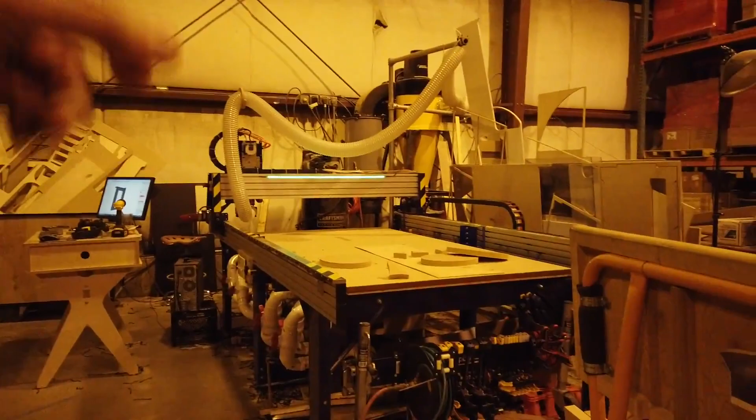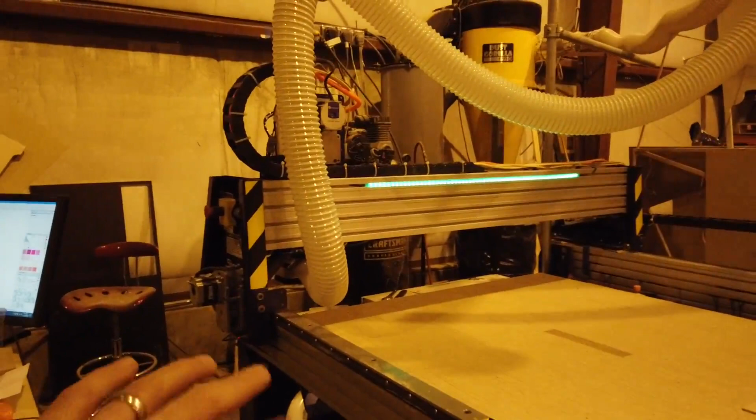Hey everyone, I wanted to show you a demo of some software that I've been building for use in shops, not unlike this one that sort of is lit like the surface of Mars. And the software is specifically for using on subtractive machines like a CNC machine like this, or perhaps a small portable one like that, or even big industrial machines as well. They're called subtractive because they typically have a spinning bit or a laser or a torch mounted to them so they can go remove material.

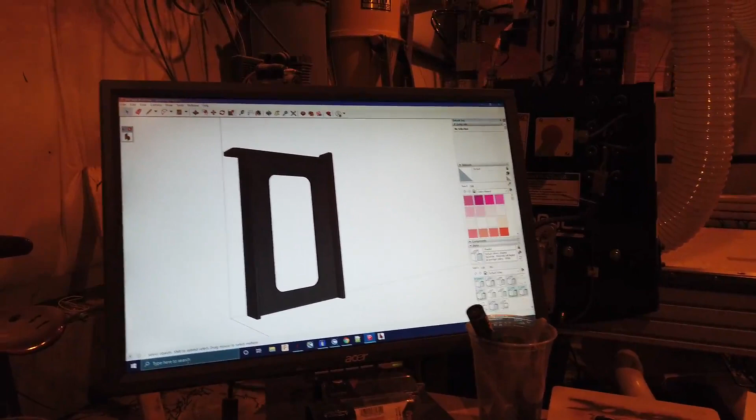So the process normally is to draw your thing in the CAD software of your choice, and that's CAD. And then the middle software is called CAM. This is very expensive, very complicated, very antiquated software. Without doing an extensive demo of some of the software that's currently available, this is a really popular one for machines of about this size.

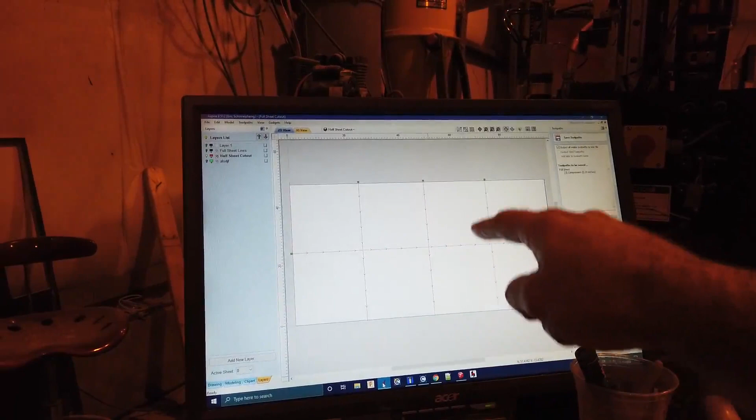It is so primitive that if I were to draw a rectangle in SketchUp or anything else and bring it into this piece of software, it would be at best 4 lines that happen to be near each other. This software has no awareness of the thickness of the material, the strategy used to cut it out, or even the machine that it is connected to. It's really, really super primitive.

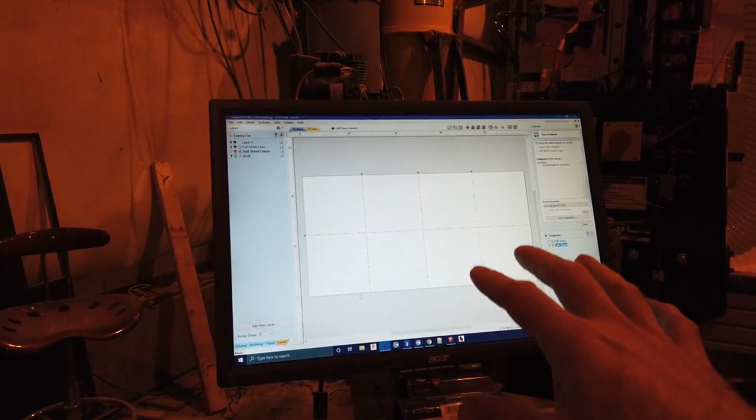And so with this software Fabber that I built, we've actually solved for a lot of the heartache. And by the way, this is a $3,000 piece of software. This goes up to about $25,000 in software for machines of this size, depending on the flavor that you get. And they're all just as complicated and expensive and frankly dumb to use. So let's do a demo here.

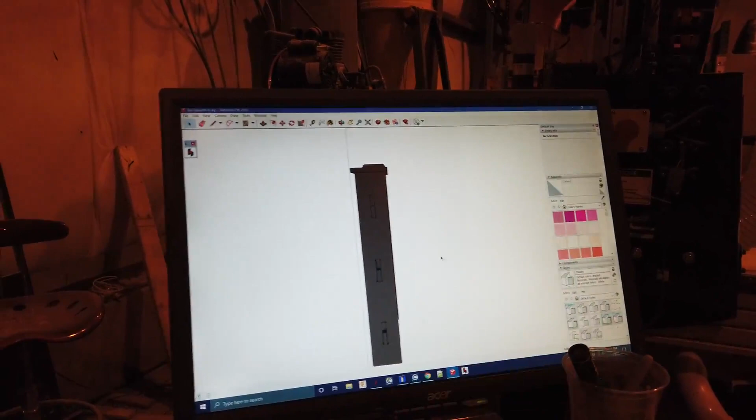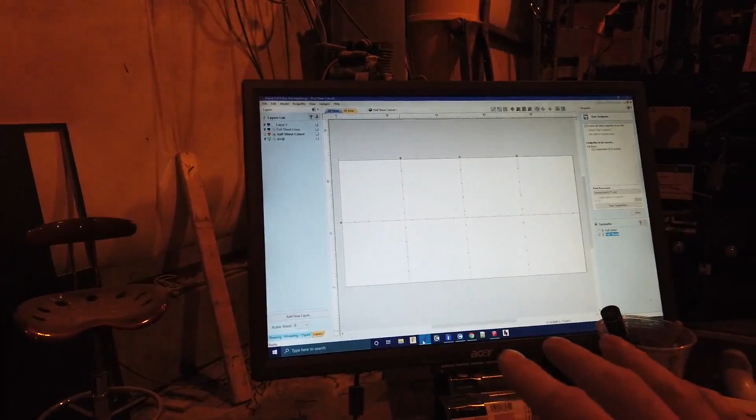So this is a thing that actually goes in between arcade machines. So you put this in between, you've got a good place to set your beers down. If I were to make this using traditional software, I'd have to draw it in SketchUp and then hand lay out all the parts, bring in all that geometry into here, and it's all flattened geometry. The arcs are typically broken up, and that's not necessarily because of SketchUp. And I have to spend, to be charitable, about 2 hours prepping this all to get it ready to cut these parts out to send to this machine.

And so here's how it works with Fabber. So what we have here, we have the 3D model, and you can kind of see some of the detail here. We've got some pockets, some little hook fasteners, things like that. So the 3D model is just as it exists. And I don't need to do anything else. No flattening, no taking it apart, no reverse engineering the model. Just take it and press our little Fabber button.

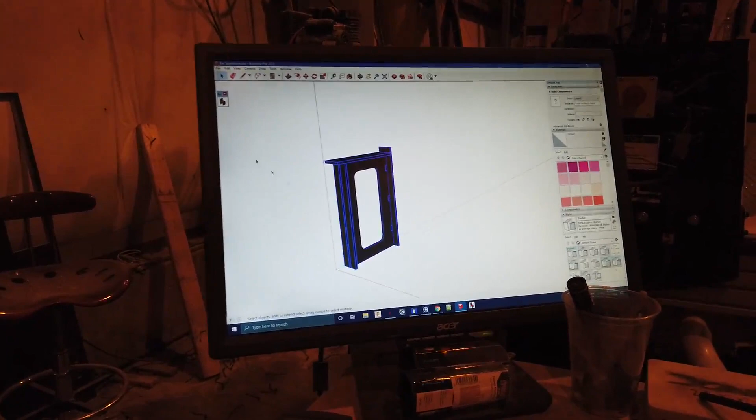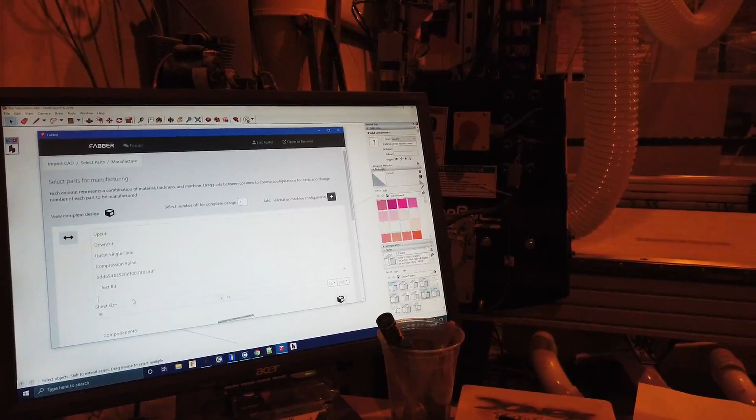And what this has done, it's extracted this file out of SketchUp and sent it to Fabber Clouds. This is actually an HTML window that's rendered here. And so we're just going to answer some questions about what kind of machine you have. So I'm going to tell it my machine, which is my ShopBot high voltage, that it's out of plywood, that we're using a compression spiral, material size, all that stuff.

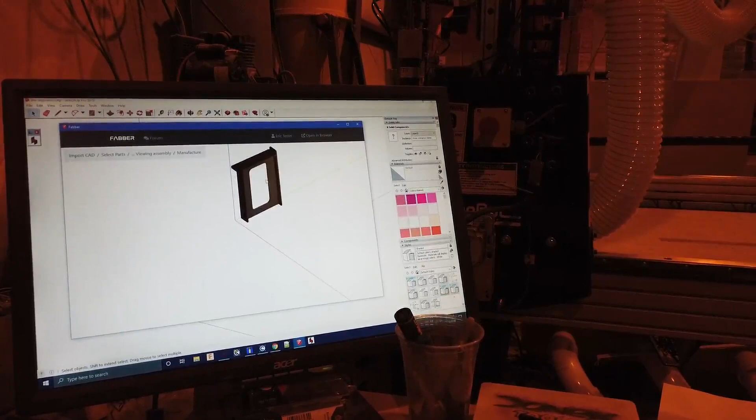And then we've got all the parts here. So these are all the parts that are extracted out of SketchUp. Their names are here. As you can see, I've not done a good job at naming these files. You can even go through here and see the complete design just to check to make sure that we got the right parts brought in. And again, this is all done on our web app. It's sort of cached locally, but it's not happening locally. So go back over here, make sure everything that we want is accurate.

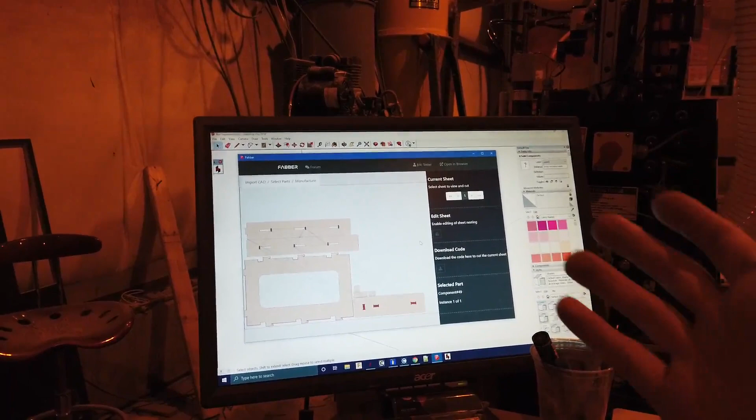We press manufacture. And our special Fabber gremlins are going through and making toolpaths. Download the code. And let's just place this on the desktop here. And that's it. That would take 2 hours in just about any competing software. We did it, with narration, in under 2 minutes.

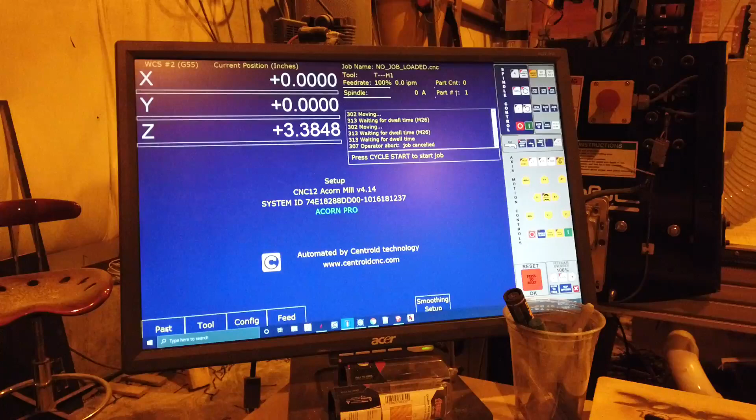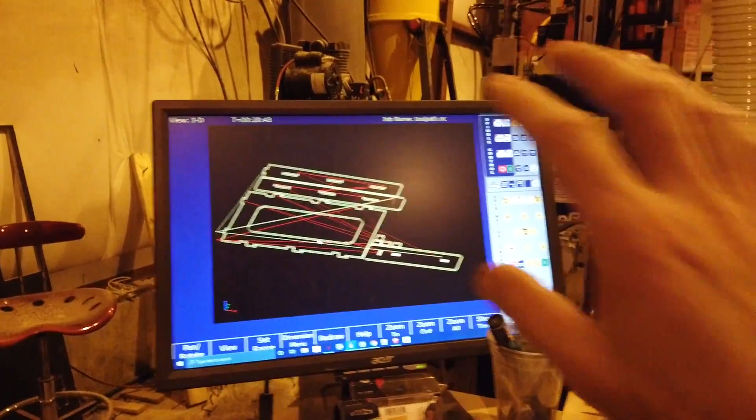Now, just to prove that it actually works, I'm going to go here and set up something so we can cut this. Okay, we're all set. So I'm going to load up that file that we just generated from Fabber. And we'll do a little preview. As you can see, all of those parts, as you may recognize them from SketchUp. This is the actual machine control software. We don't build this part. This is built into every machine. But that file looks good. And we're going to go ahead and run it.

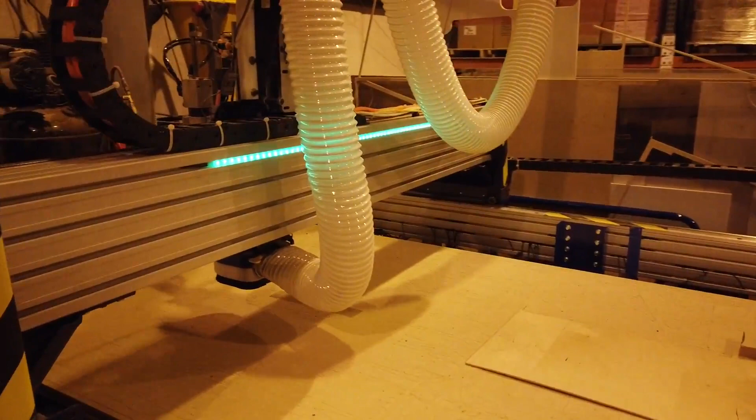And there it is. So, to save your eardrums, this is not loaded up with material, but this is the machine driving over here and using those toolpaths to cut out all of these parts. So this very much works. One of the things that might be interesting to you guys is, let me just stop this here.

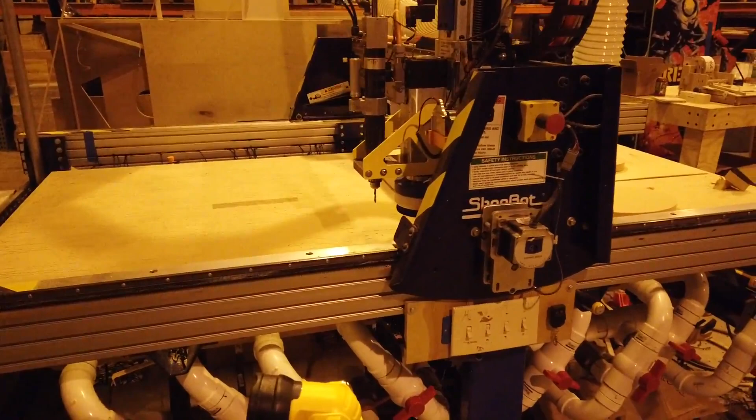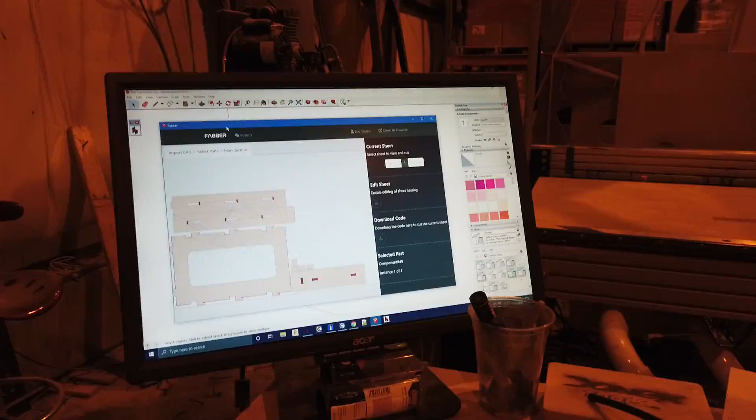This was totally built as a web app because one of the visions that I have is, while we're seeing it here in SketchUp desktop, I really think this would be a great add-on for the web version of SketchUp. That's one of the reasons that we built this completely web-based. And for other reasons too, we can pull in models from other CAD softwares as well, Fusion, Onshape, and a couple others. And being on the web makes it a lot easier to be the hub for all of this stuff.

So that is a quick demo of Fabber, and this is not a canned demo. This is real. These are real projects, and I use this for real here in the shop. So interested to know your thoughts.